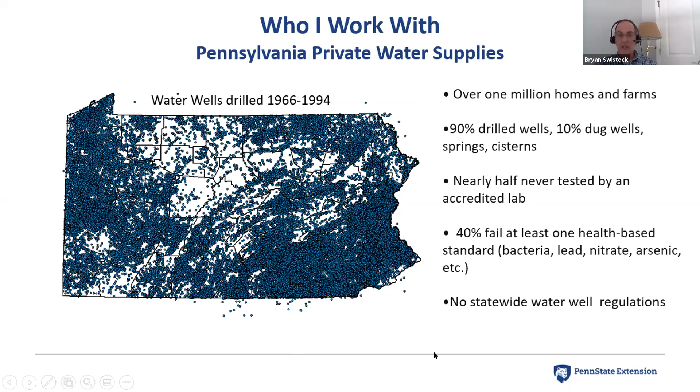Just a quick review about lead in private water supplies before we get specifically into treatment. As far as a drinking water standard, there really is no true drinking water standard for lead. It's got what's called an action level of 15 parts per billion, or 0.015 milligrams per liter. It is too often used as an MCL or as a health-based standard. So we use that 15 part per billion action level in replacement of a health-based drinking water standard. And it's kind of unfortunate because that's really not what it was ever intended for.

And I was around during the great debates of the 1980s when the drinking water standard for lead was 50 parts per billion, and they were trying to decide what to make it. And there were a lot of people that thought the standard should be 5 parts per billion or should be 10 parts per billion. And they finally settled on the 15 part per billion action level, which is really geared toward municipal water supplies. And we really don't have anything better to use for a private water system owner, right? We don't have any true standard. We can use the 15 part per billion action level as a replacement for that, but it's important to realize that's not really what it is.

There is a goal of 0 milligrams per liter, recognizing that lead can only do bad things. It has no good use in your body. And so any amount of lead can be damaging. And in fact, even levels as low as 1 part per billion can be a problem for very young infants.

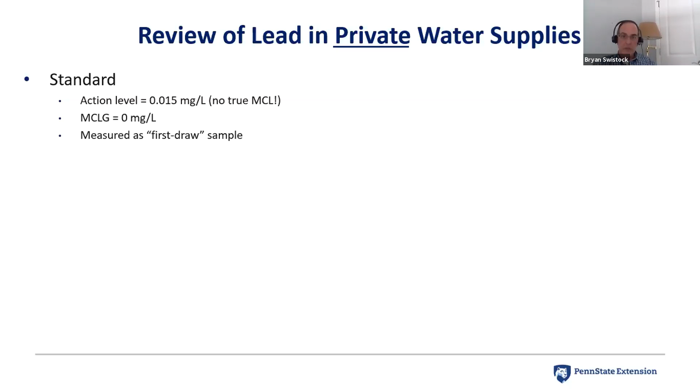The sources of lead, as Reem mentioned, there are occasional cases of source water contamination. Even naturally occurring lead can happen, but those are typically pretty rare, and I'll show you some data on that. The typical source is corrosion of household plumbing, and in Pennsylvania, corrosive water is the most common water quality issue that we run into. More than 60% of our wells and springs have corrosive water.

When it comes to corrosive water, it is extremely complex. There are different indices that we use. None of them are perfect, but there is what's called the Langelier Saturation Index, or the LSI index, that we use. It's a calcium carbonate saturation index, which basically looks at the nature of the water and whether it's going to deposit calcium carbonate or whether it's going to leach materials from the plumbing. And so negative LSI values indicate corrosion, and positive LSI numbers mean scale formation, where scale will be deposited in the pipes.

There's also a galvanic corrosion index that we can use: the potential to promote galvanic corrosion, which is based on the chloride to sulfate mass ratio. This ratio became more popular because of what happened in Flint, Michigan, because increased chloride levels can cause more galvanic corrosion to occur.

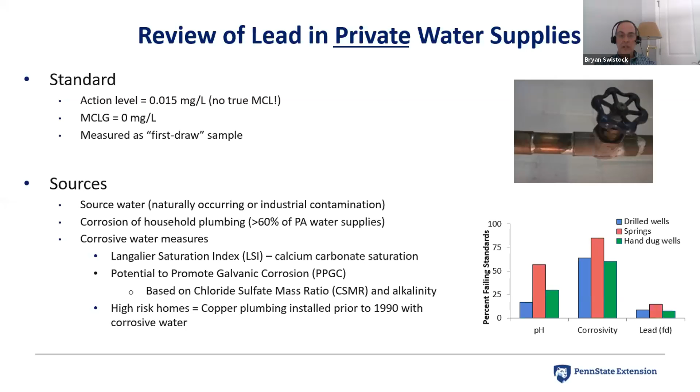Now, as far as what we do to reduce lead, and we'll get into more details on all this, but obviously prevention is what we prefer to do. And the best case scenario is to go into a home that's got a lead source in the plumbing system and remove that plumbing system and replace it with a non-leaded source. So that would be something like taking out old copper plumbing and using PEX or approved PVC plumbing in its place that will not corrode.

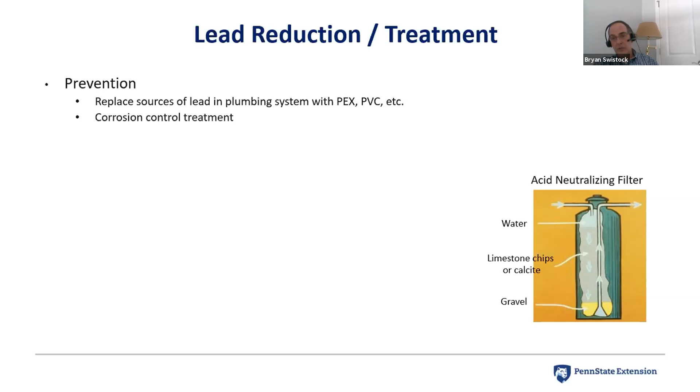We can also put in corrosion control treatment, where we leave the plumbing system intact, but we put in a treatment system that will make the water less aggressive toward the plumbing. And that's things like acid neutralizing filters, which we'll talk about in more detail, where we treat all the water coming into the home. We reduce the corrosivity of that water and make it non-aggressive toward the metal.

The simplest treatment method, if you want to call it treatment, is simply to flush the plumbing system and get fresh water out of the well, because it does take some period of time for lead to leach from the plumbing. And usually we throw around an hour minimum, sometimes several hours, before lead can reach appreciable concentrations as it sits in contact with that lead solder. So the idea is, if you just go to the tap, run the water and flush out all the plumbing and draw fresh water from your well, that you'll get lower lead concentrations. It assumes that you don't have lead in the source water, which again is a rare problem, but it will work very effectively if corrosion is the main issue.

But it's a lot harder than it sounds, really. We have a lot of complexities with plumbing, the size of the plumbing, the amount of water use, exactly how corrosive the water is, how much lead solder is present. So it's hard to give people generalities about, okay, run the water for X period of time and you're going to be fine. And this gets really complicated in public water supplies, right?

It's actually pretty simple for private water supplies, where you maybe just have a single home on a well. But when you get into large municipal systems with lead mains, or you get into apartment buildings with massive plumbing systems, that's where the flushing of the plumbing system can be much more problematic to try to avoid lead. And we'll talk more about flushing. I'll show you some data on that.

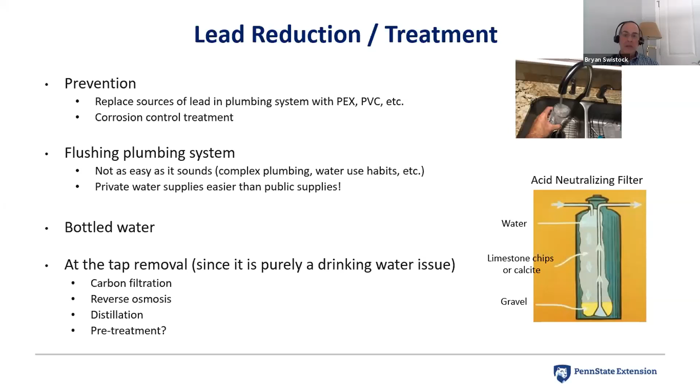So it is somewhat more simple in that respect, in that we can just remove it at a single tap and use that tap for our drinking and cooking. So we'll touch on all of these in a little bit more detail. I'm not going to talk more about bottled water, but bottled water is obviously an option if you're trying to avoid lead, assuming you get a good quality bottled water that doesn't have any lead issue.

Now, what about lead in source water? So one of the first distinctions we always have to make with treatment is, are we dealing with a problem that is coming right out of the well, or are we dealing with corrosion in the plumbing system where the source water does not have any lead?

This has been challenging in the past because for a long time we had problems with lead corrosion even down in the well, and we still have a little bit of that, but there was a time when some of the submersible pumps had lead impurities in the actual pumps themselves. And so if you put that pump down into a well with corrosive water, it would slowly dissolve away the casing of that pump and would produce lead actually down in the well.

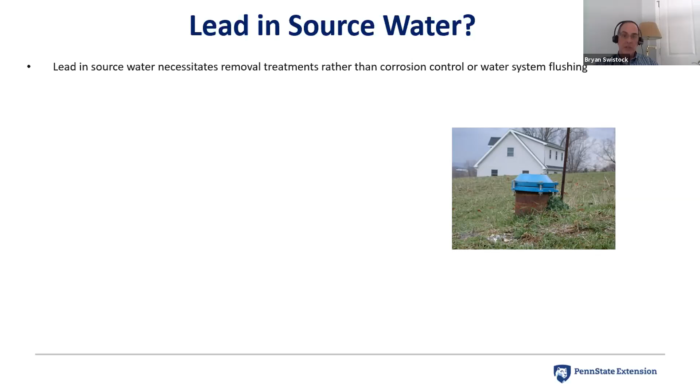And there were other metals that were used in the casings and in other components of the well that occasionally had lead impurities in them. So we have to distinguish how commonly do we find lead actually in the source water, because that's going to necessitate different treatment. We can't just use corrosion control or water system flushing. We would have to use some sort of removal strategy like an RO system or a distillation unit, because we need to treat the water as it comes in from the well itself.

Now, there have been some studies here in Pennsylvania that have looked at source water contamination from lead. There was a large look at pre-gas drilling samples in large areas of the state. Over 11,000 samples were collected, and these were basically pre-treatment samples, so they would be ideally coming from the well itself, and they found 3.6% of those samples had more than 15 parts per billion of lead. So that's a pretty significant number. That indicates a more significant source water problem with lead than I would have maybe expected.

Our lab here at Penn State has collected thousands of private water system samples. They are homeowner collected samples, which is an important caveat. And we never know exactly how the homeowner is collecting the sample. We give them instructions, but it doesn't mean they do it correctly. And in that large data set, we find that 3% have lead in running water samples. So these would presumably be samples where the homeowner flushed the water supply out. Now, again, did they do it properly? Did they flush the sample enough? That's always a big question.

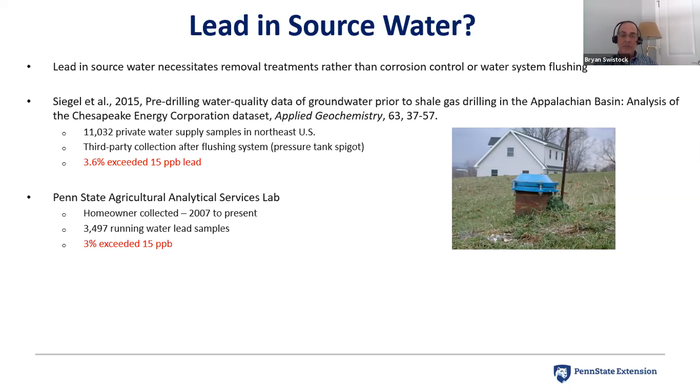So my gut feeling and my perception of this is it's somewhere between 0 and 3%. I know in dealing with those 3% that have submitted samples to our lab that had running water samples, in follow-up with a lot of those folks, we found that they simply did not flush the sample long enough. And when we followed up and went through another set of samples where we flushed an extra period of time or looked at the pressure tank specifically and flushing of the pressure tank, we found that a lot of those samples turned out to not have lead in the source water.

So I think it's safe to say it's a very rare event. I can really only think of a few cases that I've dealt with where we could absolutely say that lead did occur in the source water due to industrial contamination or due to some naturally occurring source of lead.

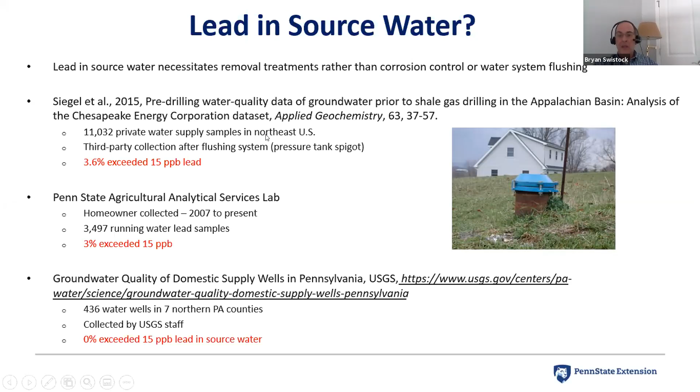So the vast majority comes from corrosion control, and this is what a typical water test report might look like. And I get these almost daily from our laboratory here, where you notice on here we have a pH of 5.99, so slightly acidic water. It's very soft water. It only has 23 milligrams per liter of total hardness. It's got a corrosion index, in this case, the Langelier saturation index of negative 3.05, which indicates a strongly corrosive water. You see that the running water copper was practically nothing, but the first draw copper was over 1 milligram per liter.

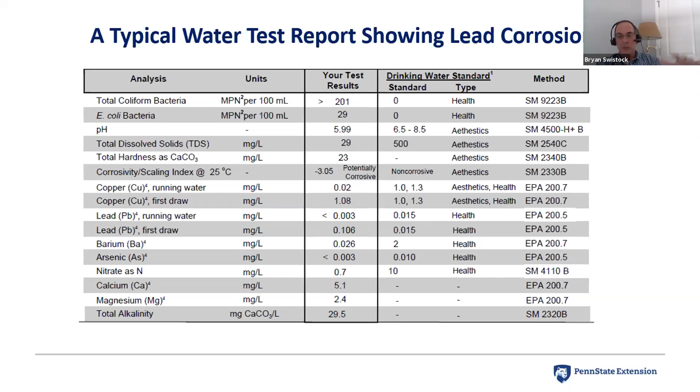Similarly with the lead, the running water lead was below detection, but yet it had over 100 parts per billion of lead in the first draw sample, the 0.106 milligrams per liter, or 106 parts per billion. So this is a very classic case, and we see samples like this all the time. Very, very clear indication that the corrosion of the plumbing is what's causing the problem here, because we have no lead in the running water sample, but we have lots of lead in the first draw, and we've got a very corrosive water supply.

So one of the issues with treatment of lead in particular is awareness. And I've shown this graphic in other presentations that I've done, and it was really one of the most startling things that I've ever seen in my career, was when we look at how aware people are of a water quality problem in their well. We know that they're very aware of aesthetic issues like hard water and iron and sediment, things that they can see or they can taste. Their awareness is very high. But things that do not cause an obvious symptom, their awareness is very low, unless they test the water for it.

And in this particular study, we tested 701 water wells across Pennsylvania. And in that study, we asked people before we tested their water, of all these different parameters we list, which of these do you know is already in your water? Before we even test it, what do you know is wrong with your water? And then we compared what they knew was wrong with what was actually wrong. And that's what these percentages are reflecting on here. And the lead you see there is a 0.

And in this particular case, out of the 701 water wells, 84 had lead above the action level. And when we went back to those 84 homeowners and looked at their surveys, 0 out of those 84 people selected lead as a pre-existing problem that they knew they had. So there was total lack of awareness of lead, which is not terribly surprising. It has no obvious symptoms other than the copper symptoms that you might notice. And it's not tested that frequently. At least it hasn't traditionally been tested very frequently compared to things like nitrate on this list, where there's more awareness because there's more testing. Similarly, bacteria, there's more awareness because there's more testing of that problem as well.

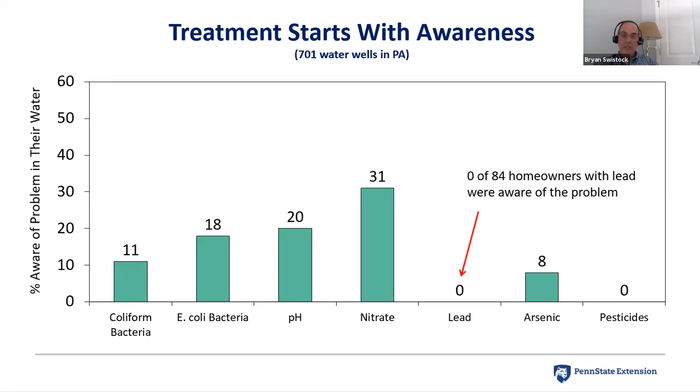So the big hurdle to overcome with treatment of lead is just, first of all, making people realize that they have a lead problem and getting them to test the water. And we see here in Pennsylvania, again, with our lab, based on the Ag Analytical Services Lab here at Penn State, over 13,000 samples since 2007. A little under 3,000 of those people chose to do lead and copper analysis, which is about 20% of all the samples. So these are people selecting to get their water tested, and they select what they want to have tested. And only about 20% select to do lead and copper analysis. And that's actually higher than it used to be. We found up until a few years ago, it was running closer to about 10 or 12%.

As soon as Flint, Michigan happened, the awareness of lead increased and more people started asking for lead analysis, especially as part of home sales and mortgage companies and home inspectors. We started to see more people paying attention to lead, but it was maybe 10% or so prior to that that were actually testing for lead. So this is an important hurdle to overcome. You can't treat something that you don't know you have. And unfortunately, lead is such a serious health problem. It's one that you really have to make sure that you're testing for.

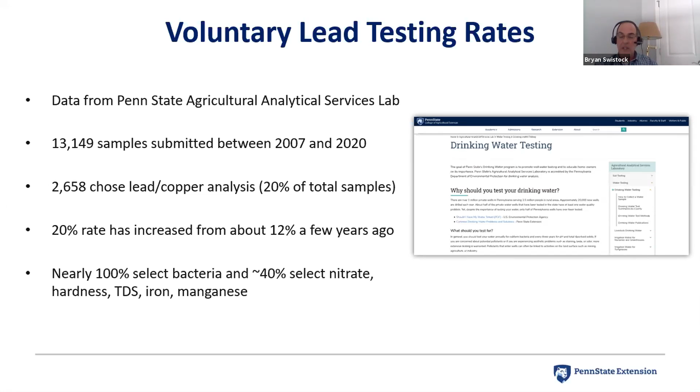And when we look at the percentages that are testing for other things, practically 100% test for bacteria, 40% test for nitrates and things like hardness and total dissolved solids and iron and manganese. Again, mostly aesthetic issues is what they're testing for. And they're paying much more attention to those than maybe to those health-related pollutants that really should be getting more attention, because testing is the only way that you're going to find out about them.

And that is really important with this graphic, because it shows that 0% of these people before we did the study were aware of lead, therefore 0% of them were actually treating for it. And we even looked at their surveys and looked to see how many of those 84 homes were already just inadvertently using bottled water.

So they were inadvertently avoiding the lead, even though they didn't know they were doing it. Or how many had an RO unit already installed, so they were inadvertently treating for lead, even though they didn't know it. And actually, in this case, none of those 84 homes had any kind of treatment or any kind of system in place to avoid the lead.

But by the time we told them about it, 75% had taken action. They were using bottled water. They were flushing the water system. They were installing corrosion control or reverse osmosis or carbon filters. They were doing something. So it indicates there's a very strong interest, of course, in drinking safe water. That's a given. But that awareness hurdle has to be overcome mainly through the testing aspect first, and then we can start to match up the proper treatment.

And we really spend a lot of time here at Penn State trying to make sure that people have access to this testing. We give out thousands of free or low-cost water tests. Right now, we're giving out about 650 tests every year to private water system owners in Pennsylvania.

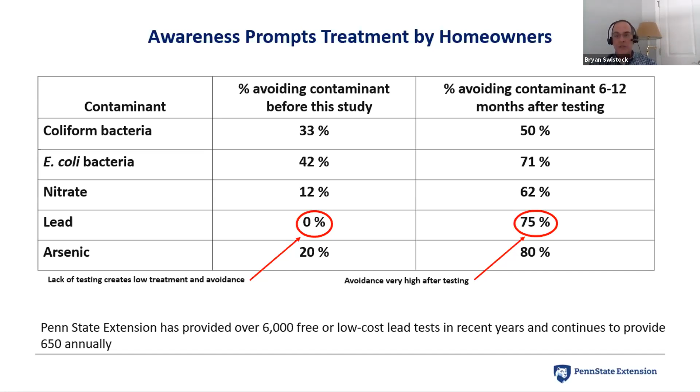And on the public side, a lot of public water suppliers are doing the same thing with lead. They're offering free testing to their customers because lead is a big issue in municipal systems, because it's home by home. It's not something they can just test at their treatment plant and then tell the community what it is. It can be very different from home to home, and that's why getting everybody tested is really important.

So the first thing to talk about, and it relates to treatment, is how important is treatment now and how important is it going to be based on the regulations that are in place and are happening to try to reduce lead. And so there have been a variety of different regulations passed.

Back in the 80s, there was the Safe Drinking Water Act, Section 1416, which started to reduce the amount of lead in solders. It reduced the lead down to less than 8% in fixtures, and it's what came up with that action level. And so that was kind of the first step where we started to control lead in public water systems, and then also in private systems, because we started to reduce solders.

There have been various tweaks to this, and there was a revision in 2011, which took effect in 2014, which started to redefine what lead-free meant, started to reduce that fixture level from 8% down to 0.25%. And so it started to tweak the regulations to get better control over lead sources, even within fixtures, not just within the solders, which was a lot of what the original Section 1416 did.

And so what we've seen over time are these regulations taking effect and reducing the amount of lead solder, reducing the lead in fixtures, so that even if you have corrosive water, we should theoretically be seeing less and less lead as older homes are renovated and they start to use different systems.

So for example, the picture on the right is a PEX system where we have basically a tree, blue lines are the cold water, the red are the hot water. They all go out to a different tap, and it's a type of plastic line which does not corrode, has no lead in it. And so this is what you see a lot in these new homes. Instead of the old copper pipes with what was lead solder, now we're moving toward a lead-free system where hopefully the fixtures also used have very little lead in them as well.

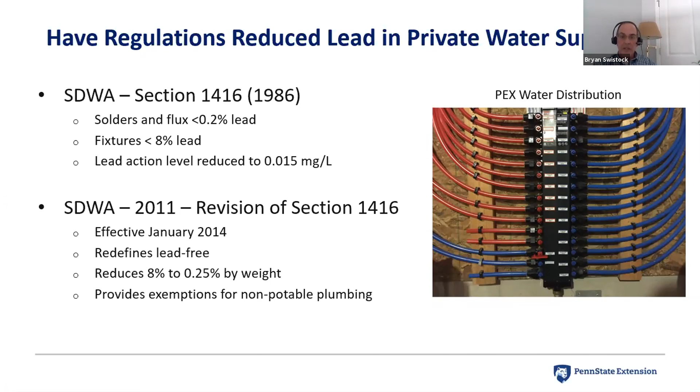So what we have seen as a result of these regulations is decreasing lead occurrence over time for the most part. This is private water system data, so mostly water wells, but also springs in Pennsylvania. The first study in 1988, if you look at the far left there, the percent of the samples in that study that were detectable above 1 part per billion of lead was 80%. So almost, again, 8 out of 10 homes that we did had detectable levels of lead.

It dropped down to just over 60% in 2007. And then last year, the most recent data, we have about 40% that have detectable levels of lead. If you look out there at the action level at 15 parts per billion, it was almost 20% in 1988 that were above the action level. 2007, we dropped it down to 12%. The most recent data, we're down to about 9% now.

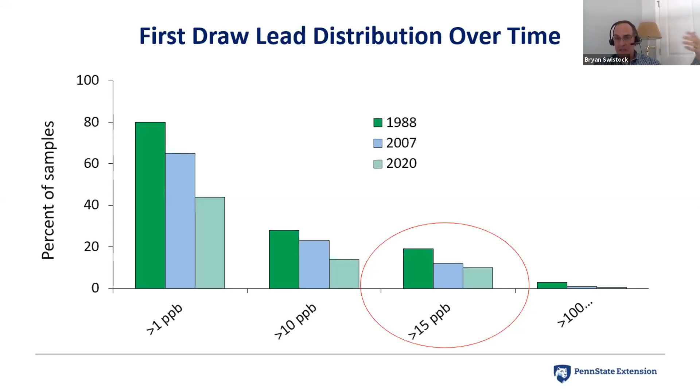So we're seeing a steady decline in the occurrence of lead, and theoretically this should continue as we continue to renovate old homes and remove the sources of lead and get the lead levels in fixtures and faucets down lower and lower. We should continue to see this lead decline. So again, theoretically, the amount of treatment that we might need to do would decline with that over time as the regulations begin to help the private water system owner, not just the public water system customer, I should say.

Now, there are still issues with new homes, and this has been a bone of contention. One of the reasons that there were changes made to the regulations was there was the realization that the regulations done in the late 80s, there was still too much lead that was occurring, especially in fixtures. And in this data, we show the year plumbing was installed, going all the way out to 2018 for some of the latest homes. And the 2 dotted lines on there show the 2 regulatory structures, the late 80s and then 2014.

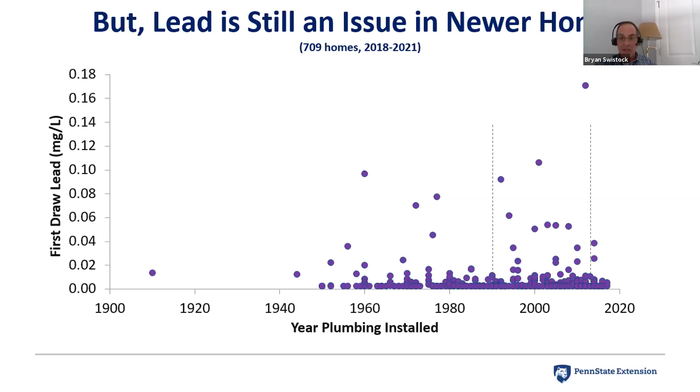And you can see there's a lot of significant lead concentrations in the 2000s going all the way out until 2016 and 17. We were seeing pretty significant amounts of lead. And the thought there was it was primarily coming from fixtures in this case. And that's one of the reasons that the new regulations really tried to tackle the fixtures and reduce the amount of allowable lead in those fixtures to try to get at this problem of even new homes having significant amounts of lead, at least in small amounts of water coming out in the first draw samples.

So let's spend the rest of the time now talking about the different treatment and removal options. And the first one being flushing of the system, which whenever I talk to somebody that's got a lead problem, and people in general, they obviously want to know what's the simplest and cheapest thing I can do. Well, there's nothing more simple than just running the water a little bit before you drink it or use it for cooking, right? That's the simplest treatment you could possibly give. Basically doesn't cost any money at all, but it is a habit that you have to get into of flushing the system when the water's been sitting.

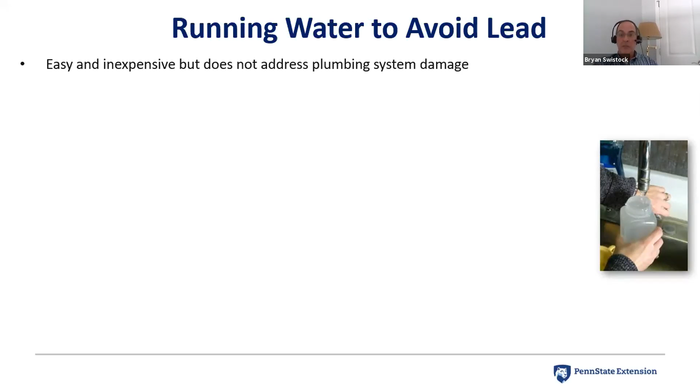So as far as running water, it's good because it's easy and cheap. It's bad though because it doesn't address damage being done to the plumbing system. So if I don't treat the corrosive water source of the problem, I'm still going to allow that damage to occur to my plumbing system. So I still may get pinhole leaks in the copper plumbing. I still may get blue-green staining from the copper coming out of the plumbing, but I may be able to at least not drink the copper and lead by running the water. So it's always important to tell people, yes, you can maybe avoid the lead by running the water, but you're not addressing the damage that may occur.

The big question, how long do we tell people to run their water for? And it's so individualistic to a home, depending on the size of the home and where you're at in the distribution system of that home. EPA guidance in 2015 said 30 seconds to 2 minutes, which is a pretty big range, but I can certainly show you homes where you don't even need 30 seconds, and homes where you need more than 2 minutes to flush out the entire plumbing system. Because we try to make things as simple and easy as possible, we've gone to a general 1 minute recommendation, telling people to run the water for 1 minute.

If they still get a high lead concentration, one of the first things we might try is to tell them, okay, let's try another sample, but let's run it for 2 minutes or 3 minutes and just see if it was just an issue of not running the water long enough. And the vast majority of the time that takes care of the problem. And those people then know that they have to run the water a little bit longer than the typical person might. Again, this is a lot more difficult in public water system areas where you have to worry about lead mains, and sometimes you'll get slugs of lead coming in from certain parts of the plumbing where even running the water may not be a solution at all.

But ultimately, this has to be confirmed through testing. You can't rely on this. So we always tell people, try running the water for a minute and collecting a running water sample. Let's compare those. Most of the time that does it. If it doesn't, let's try running the water a little longer and see what that result is. And almost all the time that takes care of the additional lead problems.

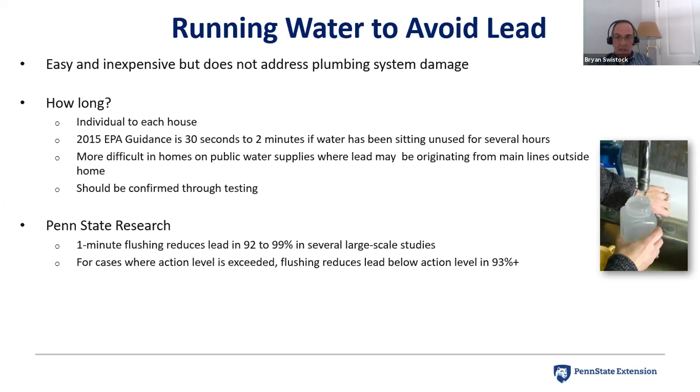If you just look at people that have lead above 15 parts per billion and separate them out and look at what's the effect of flushing the lines for those people, in our research, about 93 to 95% of those cases can be reduced down below the action level. But there's more data to show on that here in a moment, why it's maybe important to look at other aspects of that.

If you're interested in more information about flushing guidelines, there's a really great paper. I've got the URL listed on here and the citation for it if you want to look it up. It was done in 2018, looked at the effectiveness of prevailing flush guidelines to prevent exposure to lead in tap water. It looked at municipal supplies as well.

It was in the International Journal of Environmental Research and Public Health. So that's a good place to go if you want to look more specifically at flushing water and reducing lead, particularly in municipal systems as well.

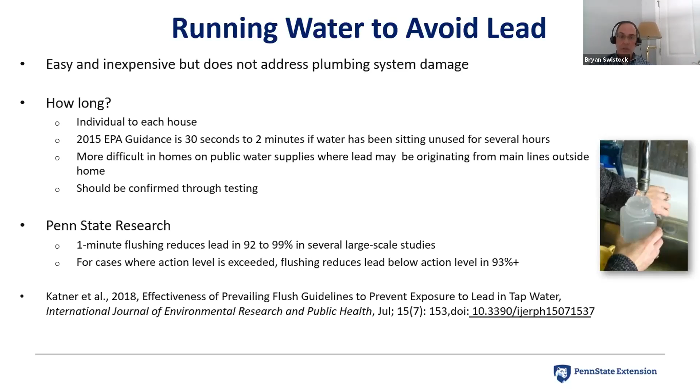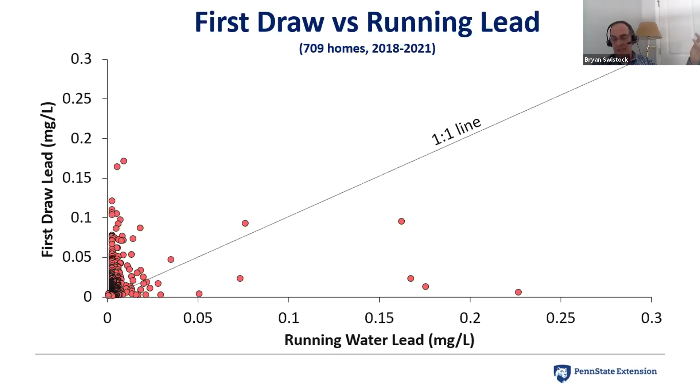Thankfully, that's fairly rare though. For the most part, running the water drastically reduces that lead down, again, in 95% or more of the cases. But there is an important caveat with this. Not only are we not addressing that corrosion problem and the damage done to the plumbing system, we also have to look at how much we are able to reduce that lead down by flushing.

So this, again, is looking specifically at samples where the lead level was above 15 parts per billion in the first draw, and then we flush for 1 minute. What is the resulting running water lead concentration? And in 62% of the cases, the resulting lead was below detection, less than 1 part per billion, which is good. But the problem is 38% of the cases still had detectable amounts of lead, above the goal of 0 parts per billion.

So that's a particular concern if we're dealing with young infants or children in the home, where we really don't want to have any amount of lead at all. Running the sample wasn't enough to get it down below detection. And that's a case where if there are children involved, for sure, we might say, maybe try running it for another minute and let's see if we can get that down even further. Or do we really have to go to something like an RO unit or a carbon filter to really remove all of the lead, because we just can't flush enough of it out by just running the water.

We can get it below the action level, but we can't get it down to really what we'd like to see, which is no detectable amount of lead. So there's good and bad with flushing.

It's definitely, I would say, what most people choose to do just because they don't want to spend the money on treatment, and they're okay with flushing the sample because, by habit, when most people go to a spigot to get a drink of water, they do tend to run the water. They want to get good cold water, so they'll run it for a while. So by habit, a lot of people do that anyway.

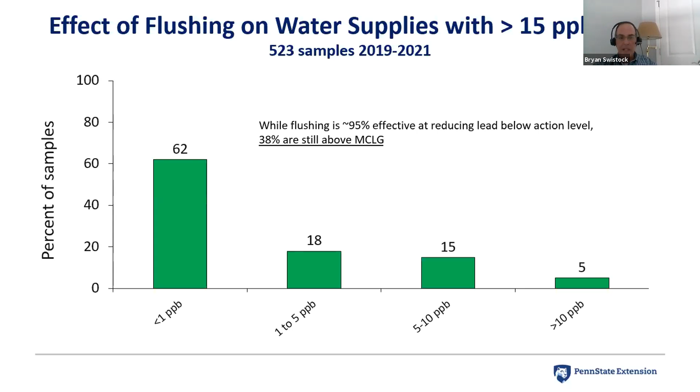Well, let's look at corrosion control as another potential way we can remove lead. We've already talked about corrosion being the predominant source, and we've got lots of research that shows that, and there's tons of research nationally that shows that corrosion is the primary method. These are just some studies that we've looked at.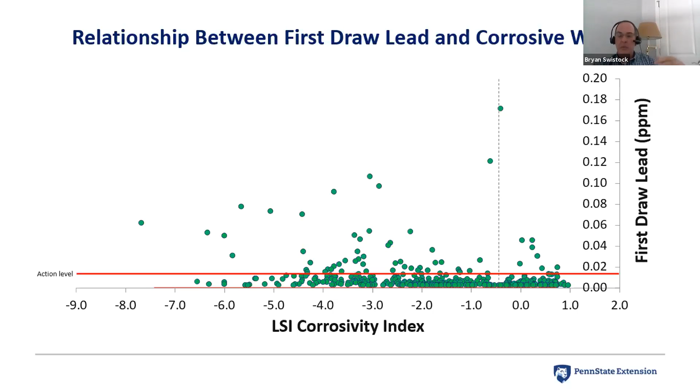But you also notice that almost all the high lead concentrations are associated with that corrosive water, but not all. You do notice a few on the right-hand side of that dotted line. In those cases, we often have to look at things like the chloride sulfate mass ratio, to see if we have galvanic corrosion occurring in the absence of a calcium carbonate problem. So there are all sorts of intricate details, and you often have to deal with lead problems case by case because there are so many complexities. But as a generalization, we can definitely say that corrosion is the problem.

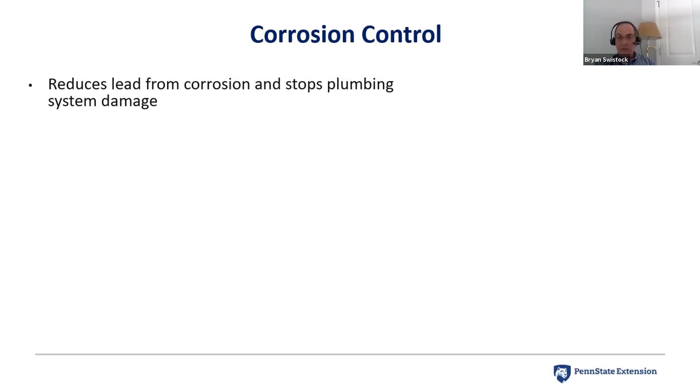So how do we treat corrosion? We can reduce it and stop the plumbing corrosion from occurring. The classic way of doing that is with an acid neutralizing filter, which is typically just a big tank filled with calcite or limestone chips, some sort of alkaline material that the water trickles through. It dissolves that material and raises the pH, the alkalinity and the hardness, and reduces the corrosivity of that water. So it's a very simple treatment device.

You just need to replace that alkaline material maybe every 6 months or every year. It depends on how corrosive the water is as to how frequently that tank material has to be replaced. So it's very simple, easy maintenance. One of the side effects is an increase in hardness, which can be a problem. Some people used to very soft, corrosive water suddenly have harder non-corrosive water, and they don't like the hardness. So sometimes they'll install a water softener after they put this in.

I hate to see that because you have two treatment devices that are fighting each other, and you really don't want to get into that, but we do see cases where that happens. There can also be problems with these if you have metals in the water. It may foul up the bed of material you have because you're starting to oxidize some of the metals out, and they'll start to coat the alkaline material, and you'll start to reduce the effectiveness of the corrosion control that you're

getting from the filter. In severe cases, we can use things like soda ash injection, where we'll take a feed pump and inject a slurry of soda ash directly into the water line. More maintenance here, a little bit more tricky, a little bit of hazardous material. Got to be careful with soda ash. But where we have really corrosive water and an acid neutralizing filter just can't raise the pH enough and can't get that corrosivity index up high enough, we can use soda ash instead.

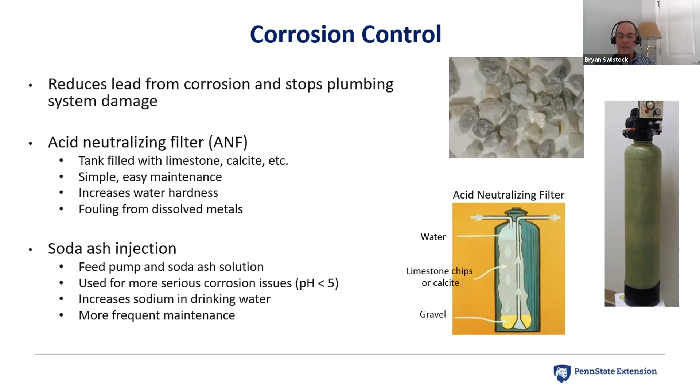We increase sodium in this case instead of hardness, which is a concern for some people. And there's definitely more maintenance. These are a little bit more tricky to deal with, and they're not preferable for sure. People I've talked to that have had both of these would definitely say that the acid neutralizing filter is a much preferable route to go if it'll work for you.

And this is a typical situation of what you see when you install an acid neutralizing filter. The before filter is on the left, and we notice a pH of 6.07, and we have a corrosivity index of negative 3.2, so very corrosive water. We've got almost 7 milligrams per liter of copper in the first draw, and we've got 13 parts per billion of lead. So a pretty significantly corrosive water.

And after the acid neutralizer, we have a pH of 7.84. We've got a little bit more hardness now. We're at 81 milligrams per liter. The pre-filter was much lower hardness, but we notice we have no lead, no detectable lead, and our corrosivity index is now non-corrosive. It's negative 0.08.

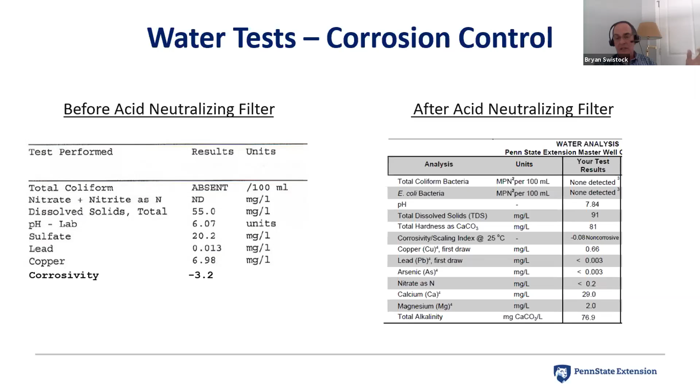So in this case, the filter worked beautifully. It raised the pH, got rid of that corrosion index problem, and brought our lead level down below detection. And so now we're protecting the plumbing from leaks, and we're not dissolving lead, we're not dissolving copper either, at least not enough to worry about. And we've been able to solve the problem just purely through corrosion control.

What we see, however, is that those systems are not installed very frequently. In Pennsylvania, we find only about 1 or 2% of people have an acid neutralizing filter, despite the fact that corrosivity is about 60% of the private water supplies. Water treatment is focused very much on aesthetic issues like softeners and sediment filters, and much less so on health issues like bacteria with UV lights or RO units or chlorine systems.

So that's one of the real disconnects we have between treatment and problems, is the treatment is very focused on aesthetic problems because they're visible and people can see and taste them, and less so on some of those health concerns. You will notice things like RO units are a little bit more common, and also faucet filters, which tend to be carbon filters, as well as larger carbon filters, are more common, thankfully, and those will help to deal with some of the lead problems.

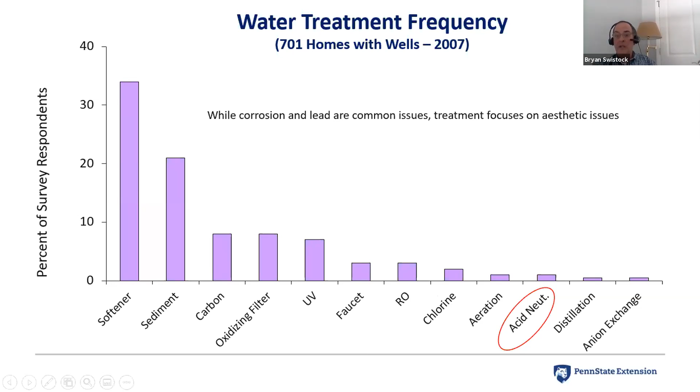We get questions all the time about, well, I have a water softener, so I don't have a lead problem, because water softeners take everything out. Well, softeners do a lot of things, and homeowners definitely believe that they will remove lead, and they will remove some lead. They're a cation exchange device, and lead is typically a cation. So you can get some lead removal from source water, but the problem is most of the lead's coming in after you would put a softener in anyway. So it doesn't address that major issue with corrosion of lead.

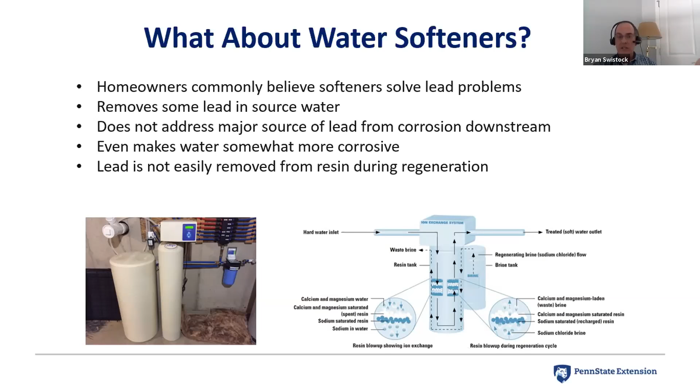And in fact, a softener by definition can make the water slightly more corrosive too. So it's really not going to be the answer to our lead problem, because most of our lead's being generated downstream of that softener anyway. We need to look at other types of devices that can actually remove the lead. And not to mention the fact lead's not easily removed from the resin once it attaches either. So it's definitely not the ideal solution, not even a preferable solution at all.

Some of the other treatments that we have, first of all, we get asked the question about, what about sediment filters?

People have this feeling that, oh, lead is heavy and it's a big particle and it's a sediment, and we can just remove it with a physical filtration process. And there is some truth that particulate lead can be important in some cases.

Again, the problem though is we put a sediment filter in where the water comes into the home, and a lot of this particulate lead might get generated by the plumbing system as particles of solder coming off downstream. So again, we might not address even some of the particulate lead that comes in after a sediment filter is installed. So there's obvious problems with this. It's certainly not going to hurt, and sediment filters are always a good idea. They're somewhat underutilized really in water treatment because they're so simple and can provide a lot of good benefits.

And filter sizes vary anywhere from 1 micron up to hundreds of microns, but typical ones, 5 micron and 20 micron, you're going to probably get some small effect, but it's definitely not an answer to a typical lead problem, and you're going to have to replace these filters about every 2 to 3 months.

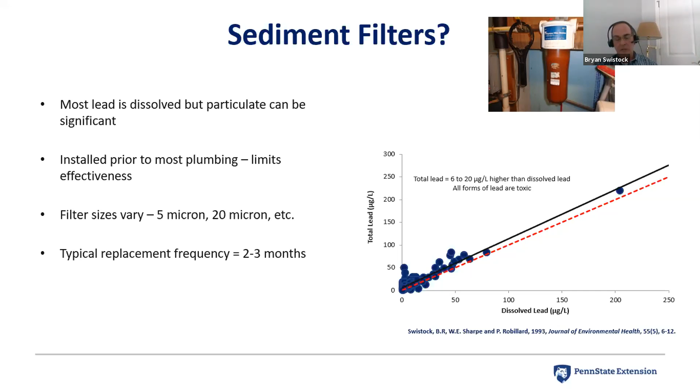Carbon filters are an interesting one because they're used for a lot of different things. They're used for odors and tastes, various organics, pesticides. You can use them for metals. You can use them for radon removal. So they have a whole host of different uses, but they come in many different ways, right? You have small faucet filters, you have under sink filters, you have large tanks that are whole house, you have pour through carbon filters. So lots of different kinds of them, and they're definitely not all created the same.

So generally speaking, solid block tend to be better, especially for lead removal, as opposed to granular carbon. But there's even distinct differences between solid block under sinks and then faucet filters. And there's subtle differences between all these. And you really need to look, first of all, at certification, making sure that they're NSF certified as a carbon filter for lead removal. Some of the advantages of these, they're relatively easy and they're cheaper than a lot of other treatments, particularly something like reverse osmosis.

But some of the things you have to be aware of is that water quality is important here, right? There can be other things in the water that exhaust the carbon, and we have to be concerned about that. Is the carbon going to get exhausted by something else in the water other than maybe just lead? Is there an organic present? Is there chlorine if it's a public water supply? What else is going to be removed by this? And how often do we need to change that filter? And that's always the difficult question. How frequently to change the filters, and are people going to change the filters?

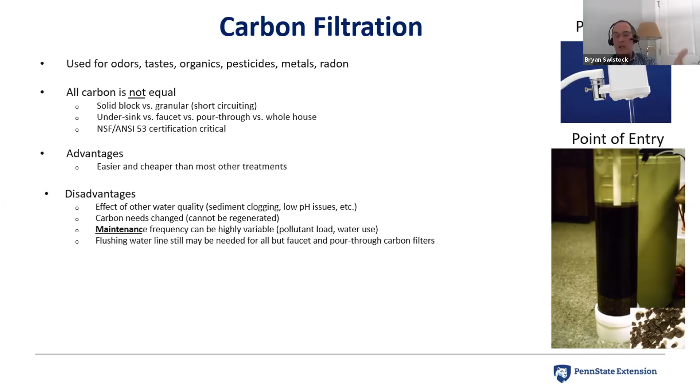And you also have to realize, depending on where a carbon filter is, you may have lead components after that filter. Even an under sink filter could have issues with small amounts of lead coming from the faucet itself after the filter. So we still have to deal with things like maybe needing to flush the water a little bit, even if we're using a carbon filter.

And there is a really excellent paper. I just got an email the other day from Riley Mulhern. I think that's how you pronounce Riley's name. And he's a PhD student at North Carolina Chapel Hill, did a really excellent paper on the use of under sink activated carbon filters to remove lead. And so the citation is listed here. They found really good removal, 98% removal among 17 homes over 6 months. And these were under sink solid block carbon filters.

And they worked even at really low pHs, which is one of the concerns about carbon, is that maybe they don't work as well on lead at low pH. And in this case, they did work very, very well. So that's an excellent paper that just came out recently if you want to look into more about carbon filters.

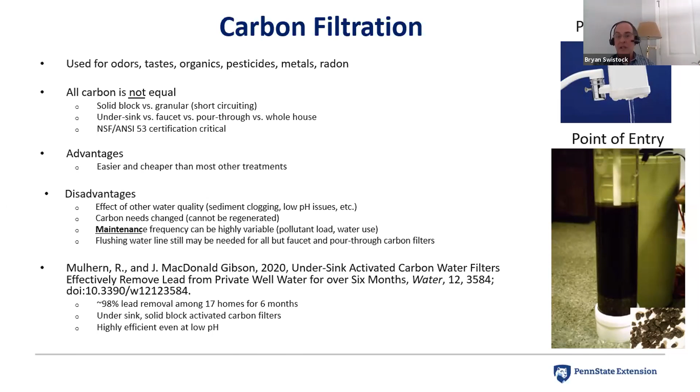Carbon holds a lot of promise, again, because it's simple and it's relatively cheap. So especially in areas of low income, carbon can be a really good source to try to reduce lead levels down in both public and private water supplies.

Reverse osmosis filters, I know they've been dealt with in other aspects of this series of treatment webinars, and they have a lot of utility for a lot of different things. They remove a lot of different things at very high efficiency rates, typically 99% or more for lead. The downsides of them, they use a lot of energy to force water through a membrane. They waste a lot of water. So they're not the best thing. I mean, they have other issues, and they also may need a lot of pre-treatment.

Keep in mind, a lot of RO filters will have several pre-filters to try to get rid of sediment and use carbon to reduce things like some of the metals that may be easier to remove before they go through the RO filter. So some pre-treatment might help, but very efficient units, not the cheapest things though, especially compared to a carbon filter. You can get into significantly more money with an RO unit, and again, wasting a good bit of water to produce it. You can even do whole house RO filters, but certainly wouldn't need to do that for just a lead problem.

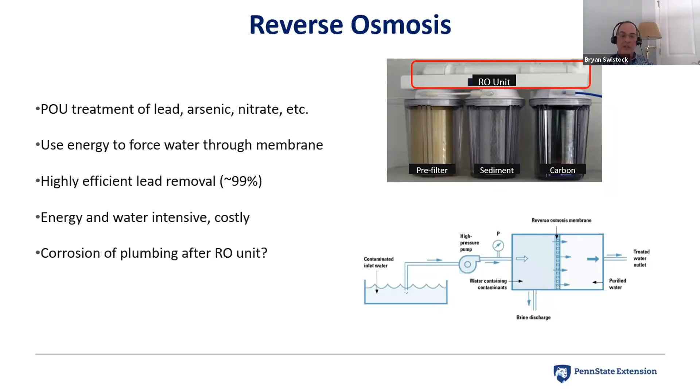And then finally, distillation units. We very rarely see distillers used anymore. They were kind of trendy back in the 80s and 90s. We saw quite a few of these, but it's actually been a long time since I've talked to anybody that has used distillation, but it's perfectly fine. It's got a similar efficiency to reverse osmosis, where you basically heat the water, condense the steam that comes off the boiling water, and you're basically just collecting pure water and whatever might move with the steam.

So one of the disadvantages of these are light organics that boil off before and would come out in the steam. So you would actually condense those and have more in the condensate. So you have to watch a few things. Those are rare problems though. For the most part, distillation units have really high efficiencies. They are energy intensive. They don't produce a lot of water, but they can produce extremely clean water, which is a very big advantage of them. And they're certainly a possibility if you're dealing with a lead problem and you want to try to remove that lead.

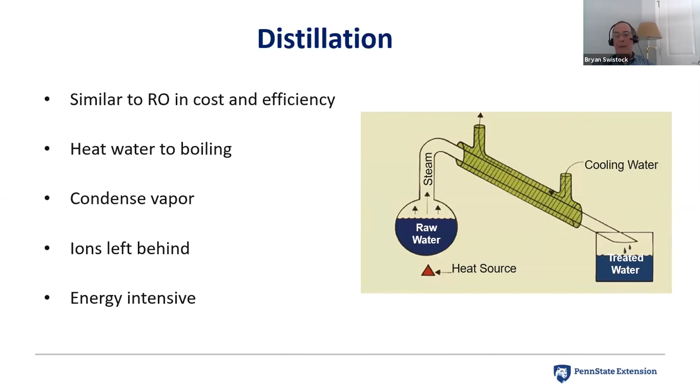But we have to remember our goal ideally is to prevent the lead from even occurring. And that's really what I always try to talk with people about, is let's figure out how to stop the lead corrosion preferably and try to deal with that as opposed to just removing the lead after it has come out of the plumbing system. So corrosion control is great. Again, it's not cheap though. We might have some cost prohibitive issues there, but it's really better if we can to try to control the problem before it occurs.

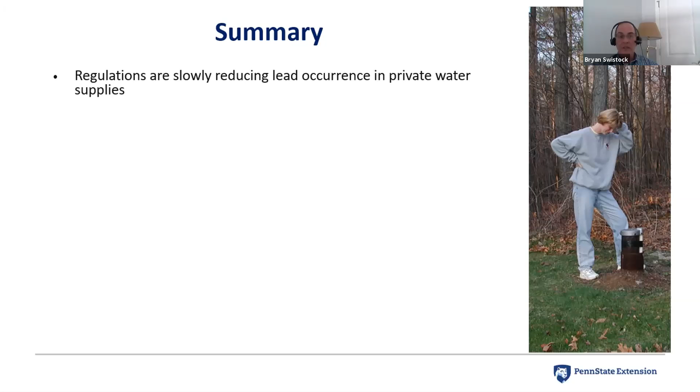So in summary, we've got regulations that are helping to slowly reduce lead over time, and hopefully lead treatment will become less and less of an issue as time goes on. This lack of awareness is a critical hurdle though. We've got to have more people in private water supplies testing their water to see if they do have a lead problem. We know that plumbing is the predominant source and source water lead is very rare.

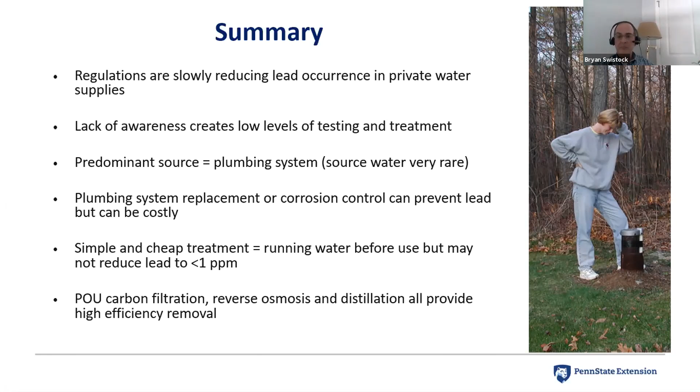And so things like replacing plumbing systems or corrosion control are the preferable route, but they're not cheap. Simple and cheap treatment can be running the water, but you have to realize you may not reduce the lead all the way down to the detection level, which is where we'd like to be. And that leaves us with things like point of use carbon filters, RO units, and distillation units, which give us really high efficiency at varying degrees of cost, but can work very effectively at producing very clean water at the tap. So with that, I will be happy to answer any questions you might have.

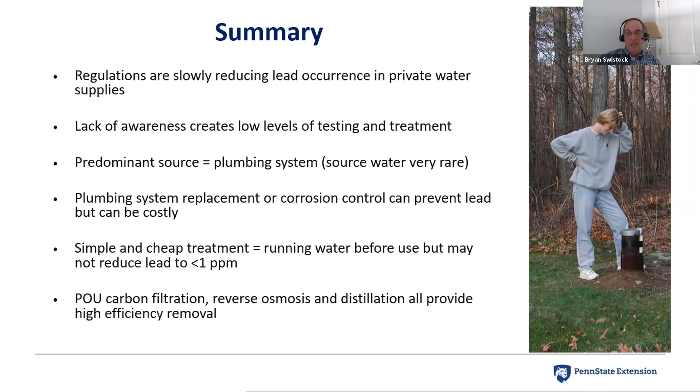So Philip asked a question, what's the typical geologic composition in Pennsylvania? Well, we're dominated by sandstones and shales, and so we do have a lot of relatively acidic water. So I would say the average pH of groundwater here is slightly less than 7. We have quite a bit of soft water, especially across northern Pennsylvania. And so when you add slightly acidic and soft water together, that's where we get so much corrosive water in

this state. We do have some pockets of limestone, which obviously produce the direct opposite. We have a lot of hard water areas. I live in one of those hard water areas where we don't worry at all about corrosion here. We have tremendous scaling problems, but a lot of the state does have acidic sandstones and shales, and there are some sand and gravel aquifers as well that can produce some pretty corrosive water.

Great, thank you. Kristen asked, how frequently do you recommend a private well owner test their drinking water for lead? Well, I think you always start with one, right? You just want them to test that one time first. And there's not a lot of reason to believe that lead's going to change a whole lot. It's not like bacteria that changes with weather. As long as the corrosivity of the water is not changing tremendously, and you're not changing the plumbing system, we would expect it to be fairly constant.

So we try to get that one test done and go from there. If they have a problem based on that one test, then we might recommend more frequent testing thereafter. But it is one of those parameters that maybe if you could just get it tested once and show that you don't have a problem, it might be something you do a few years later just to make sure that it wasn't an improper test.